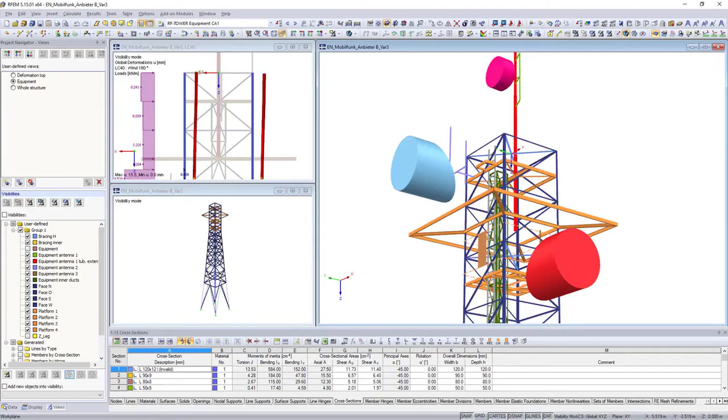Dlubal Software offers all necessary solutions in its two main programs RSTAB and RFEM to ensure consistent structural planning of triangular or quadrilateral lattice towers.

Firstly, generate your 3D tower structure with the RF Tower Structure add-on module. Use our well-known material and cross-section libraries, and quickly generate your structural system with parameterized inputs.

Horizontal and vertical bracings and possible cross arms are saved in databases, and can be customized according to your needs. For further processing, the generated beam structure is exported to the main program.

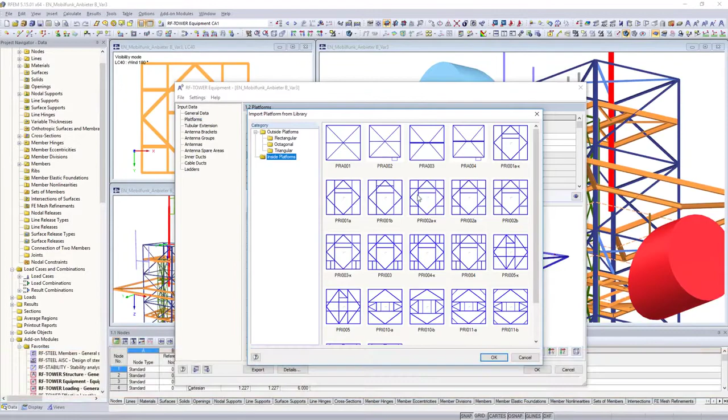Afterwards, define equipment such as antennas, platforms, ladders or cable lines in the RF Tower Equipment add-on module. Extensive libraries are also available here. Customize your equipment with different parameters according to your needs, and then export everything to the main program.

All loadings from the defined equipment are, of course, considered in the subsequent RF Tower Loading add-on module. All actions relevant for the design are determined from structure and equipment. RF Tower Loading automatically determines wind, ice and variable loads for your structure according to standards.

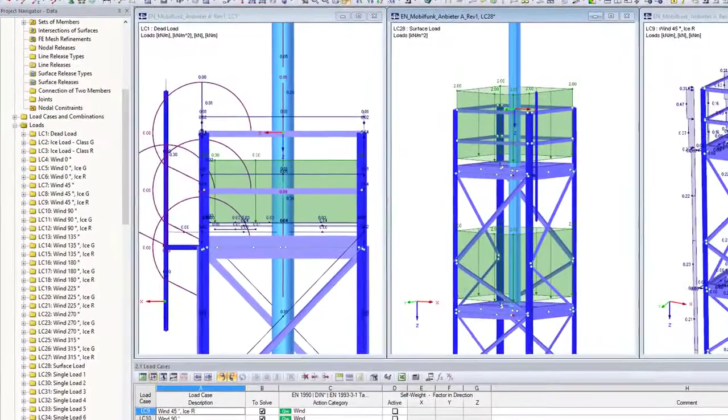After having defined the load combinations in the main program, you can automatically determine the resulting effective lengths of the lattice tower with the RF Tower Effective Lengths add-on module.

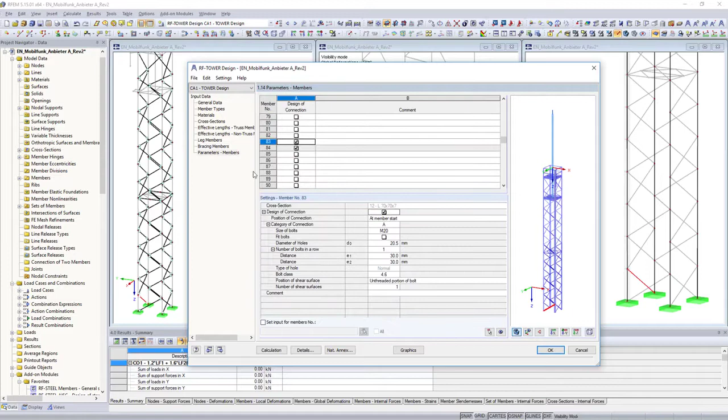The structural designs according to Eurocode 3 or EN 50341 are then performed in RF Tower Design. The other parameters for the individual components relevant for the design are automatically exported to the RF Tower Design add-on module, and considered when performing cross-section and stability designs.

Then select all necessary information of your tower calculation in the printout report which you need for the final documentation and handover.